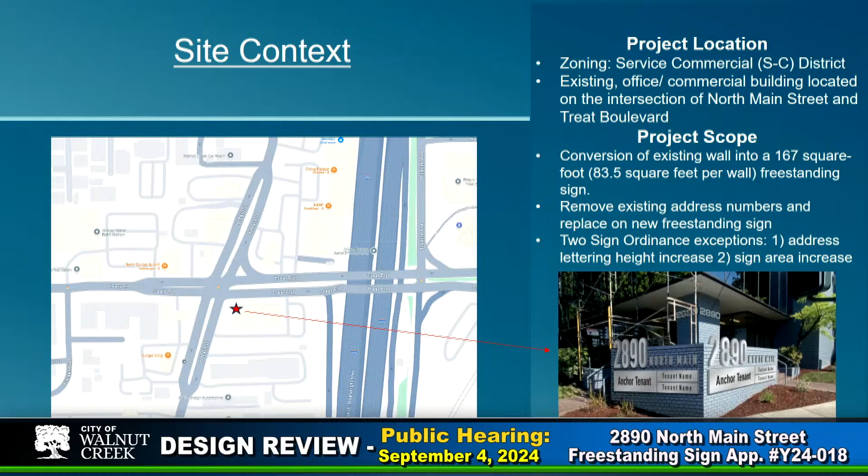The property at 2890 North Main Street is an existing office commercial building located at the intersection of North Main and Treat Boulevard. It is zoned service commercial and is surrounded by various commercial uses to the north, south, and west. Interstate 680 is located directly adjacent to the property to the east.

This project involves converting an existing freestanding structure into a new freestanding sign. The existing structure will not be modified in height, size, or material. Rather, signage will be directly installed onto both perpendicular sides. The requested signage requires two exceptions to the sign ordinance: one to increase the allowable sign area, and another to increase the allowable address lettering height.

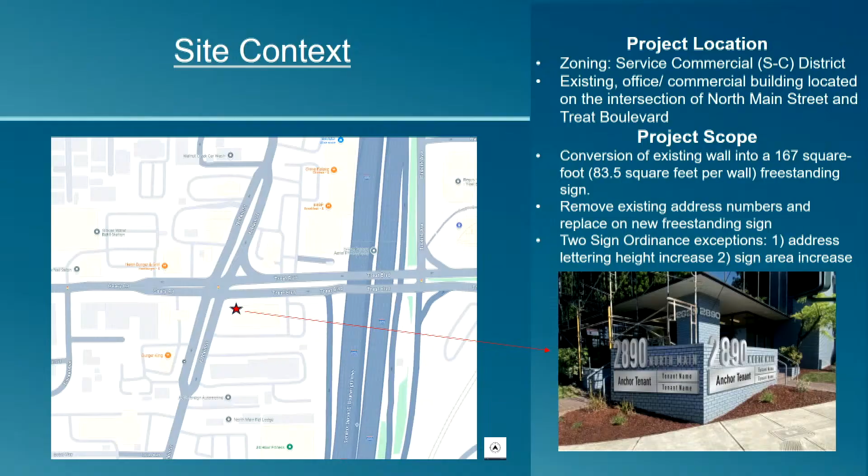The project was reviewed by the Design Review Commission Sign Subcommittee. The Sign Subcommittee supported the proposed design without recommending any modifications. They concluded that the proposed freestanding sign and the two requested sign ordinance exceptions were reasonable, as they would enhance both site and tenant identification.

The sign ordinance requires that new freestanding signs meet the required finding as listed. As previously mentioned, the Sign Subcommittee was ultimately supportive of the freestanding sign and believed that the project satisfied this finding. Given the site's location at a busy intersection, the sign will enhance visibility for both the site and its tenants, and will be clearly visible to motorists on North Main Street and Treat Boulevard. Staff is confident that the Design Review Commission can make the required finding.

Sign ordinance exception number 1 allows the proposed freestanding sign to exceed 25 square feet of total sign area. The proposed sign has a total area of 54.88 square feet, with 27.44 square feet on each side. Typically, for freestanding structures with two parallel faces displaying the same content, only one face is counted in the sign area calculation. However, since the proposed structure has perpendicular faces, each face is treated as a separate sign area. The address '2890 North Main' is not included in the sign area calculation as it is the required address sign. The two faces are necessary for wayfinding purposes that assist motorists navigating through a busy intersection. Staff is supportive of this sign ordinance exception.

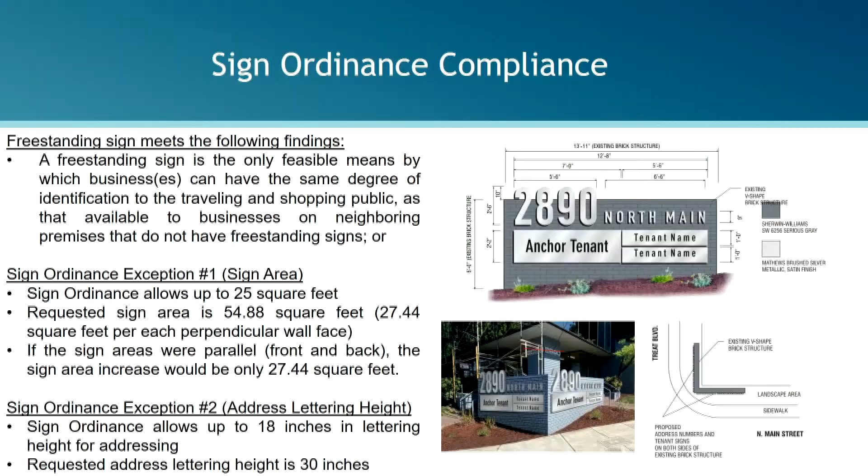Staff recommends this project is exempt from CEQA review under Section 15301 of the CEQA guidelines, Class 1 existing facilities. Staff recommends the Design Review Commission move to adopt the attached draft resolution granting approval of the 2890 North Main Street freestanding sign, application number Y24-018, subject to the conditions contained therein.

That concludes staff's presentation. I'm available for any questions you may have. Additionally, the applicant is present and is also available for any questions you may have. Great, thank you. So before we move to questions, has anyone had any ex parte communication on this project? No. No. Great, does anyone have any questions of staff or the applicant?

Okay, at this point I'll open it up to public comment. Is there anyone in the audience who would like to make a comment on this project? Nobody is coming forward. So with that, any comments from our commission, or does anyone want to make a motion?

I can make a motion to approve this project. I saw it on Sign Subcommittee, and it still looks great. So I would make a motion to approve with the language that was on the previous slide, with the stipulations mentioned in the staff report. Point of clarification, with the conditions in the resolution? Yes, that's what I meant. Thank you. Second.

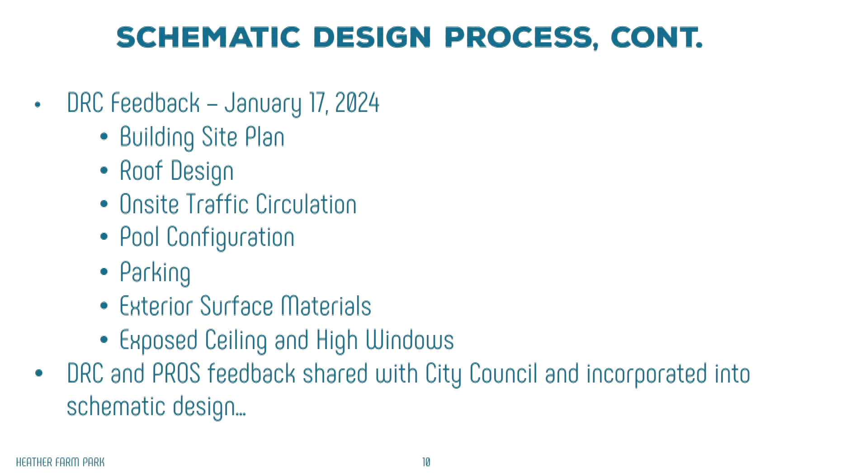So in terms of public meetings, we met with you in January, we met with the PROS Commission in February, and then we had council meetings, 3 of them, in February, March, and April. So what did you tell us back in January? This is in your report. I won't go through all this in detail, but you provided comments and feedback on things such as the site plan, the roof, traffic circulation and flow, parking, the pools, exterior surface materials, and the ceilings and windows. So we took that feedback as we went to the PROS Commission, and then the PROS Commission feedback and your feedback we took to council in March and April.

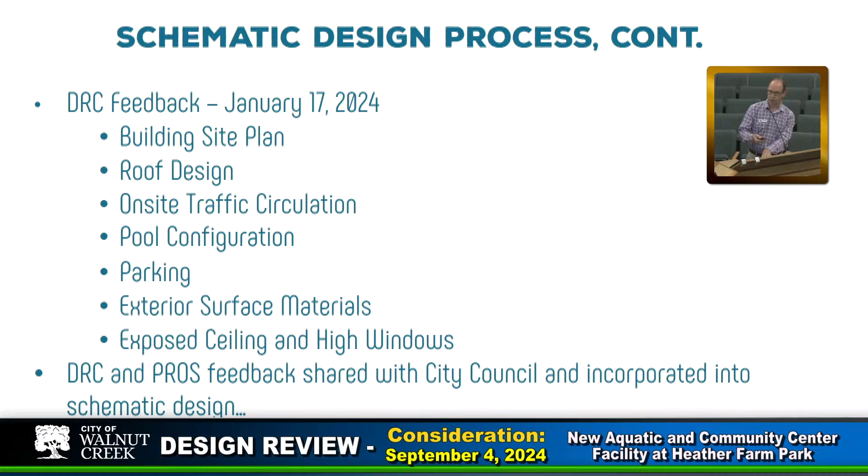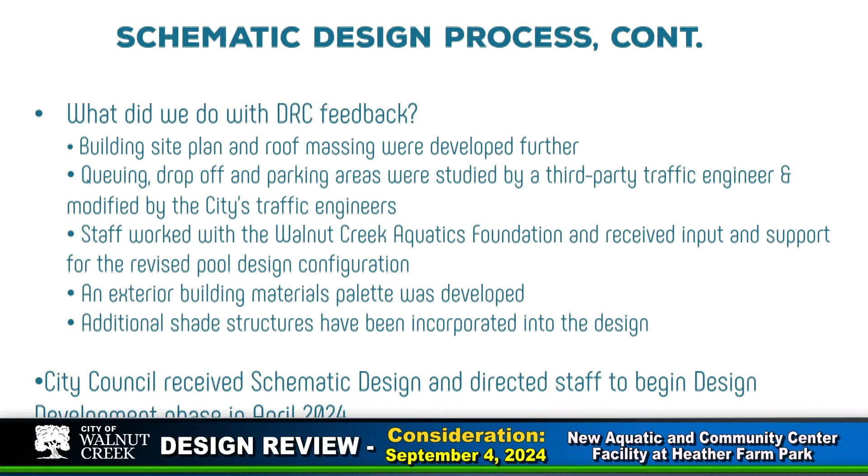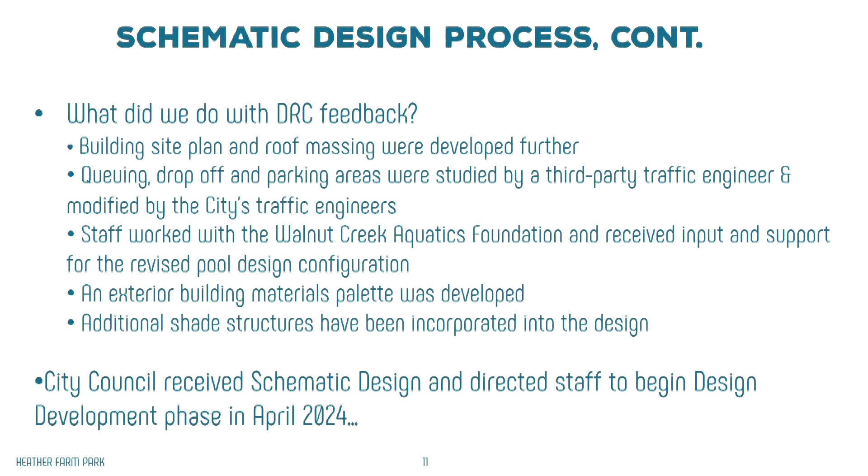So what do we do with that as far as summary goes? We looked at the site plan and the roof massing, the queuing and drop-off. We worked with the Aquatics Foundation, the nonprofit group raising money for the pools, and had an agreement with them on the design. We've looked at the materials palette for the exterior, and we've looked at shade, which is very important to the community, especially in Walnut Creek, especially in the summer, especially outside. Council received that and gave us direction to move forward to design development. That was in April. A lot has happened in the last 6 months or so.

So we had stakeholder meetings, I'll summarize that, and then we have this meeting this evening. We go to PROS on Monday, then we go to council in October. A lot has happened, and a lot will happen in a fairly short amount of time, so that's why your feedback tonight is very important. We had 2 separate stakeholder meetings, one with a group of environmental organizations, and the second with the aquatics groups. The environmental groups were the Gardens at Heather Farm, the Mount Diablo Bird Alliance, the Open Space Foundation, and the Friends of the Creek. The aquatics groups were represented there, which is more of the PROS conversation on Monday.

So what did we hear from those groups? They had suggestions about the planting palette related to trees—you'll hear about that tonight. They had suggestions about bird-safe glass in the facility, and interest in mitigating as much as possible the noise from the pool deck. Teams had interest in power and Wi-Fi on the pool deck. And if you're familiar, there are two, maybe three, very significant events that take place at the pool every year. One is the All-City Swim Meet, which happens in June—1,200 or so swimmers over the weekend. It's a big deal.

So there's interest in supporting that event in the future. And the Walnut Creek Aquanuts has two big events, one that just took place this past weekend, where they're looking to make sure the new facility supports that as well.

So in sum, all the stakeholder groups were satisfied with the design and materials, and ready to move to public meetings, which is what we're doing this evening. I'm going to turn it over to Jocelyn, who'll talk about the design development presentation package for the entire project, then toggle back and forth with Gina, who'll talk about the landscape, and I'll come back later to talk about next steps. I want to stop here for a second to see if there are questions about background or process, how we got to where we are today, and if not, I'll turn it over to Jocelyn.

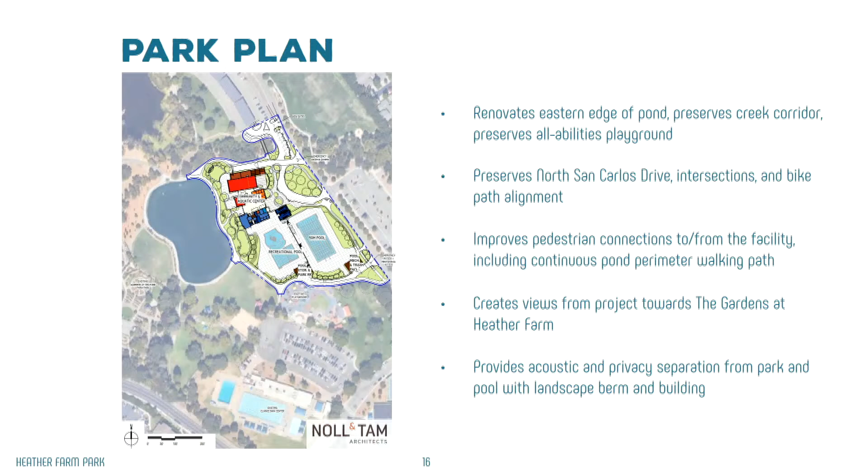Specifically, we're looking to make sure the pond experience is enhanced to some degree by completing the path all the way around the pond, instead of having to jog through the community center to make that circuit. We're trying to make sure the experience of driving through North San Carlos Drive is preserved along with the bike path adjacent to it, that pedestrians still feel welcomed to and through this site, that views of the park are taken advantage of as well as views of the community center, and that as best as possible, the somewhat noisy pool activities are sequestered from other noisy activities in the park, with quieter activities set mostly aside from those.

So within the site itself, hopefully you had a chance to look at all of these amenities. I'm going to gloss over them quickly since which amenities go where isn't exactly the focus of our meeting this evening. But we do have quite a lot of indoor-outdoor connections since we have a lovely climate here and a really beautiful park setting to take advantage of.

And there is a heavily studied drop-off and parking sequence. Everyone would of course prefer tons of parking and drop-off at all entries and exits, but this is a fairly constrained site, so the best has been done with what's available. A lot of folks have studied that, including emergency vehicle access that's had to be thoughtfully integrated with the park experience, since we don't want large typical fire lanes with heavily demarcated red zones laced throughout the park. In addition, we've had to thoughtfully work in maintenance access to the pool decks.

Within the building itself, it's arranged so that the north side has the community center functions, and the south portion has the aquatics functions, shown in red and blue. The large bar to the north contains the newest iteration of the lakeside room, still with a view of the pond and about the same seating capacity, except now there's a partition creating a spillover to a slightly larger ante-room that can make the room bigger in capacity, plus kitchen functions and furniture storage—everything needed for a large rentable conference room, ballroom, or reception space.

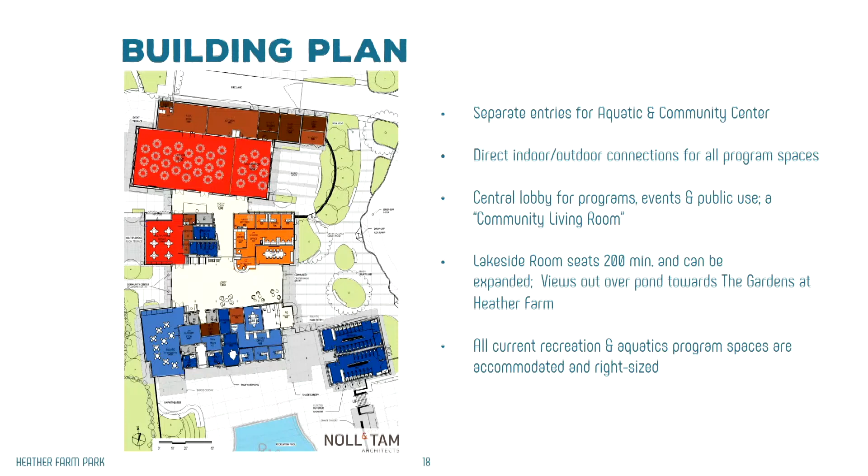There's one additional meeting room for the community center function, and on the aquatics wing to the south there's what's called the aquatics classroom. So truthfully, there are three smaller multi-purpose rooms that can act as programmable classroom space jointly between the aquatics and community center functions. The middle bar contains some back-of-house spaces, a large restroom bar, and the administrative spaces for the community center staff.

Those areas to the south shown in blue have a slightly separate volume off to the right—that's the changing room. It was actually a suggestion from one of the Parks commissioners that we try to make it as close to the entrance as possible. To do that, we had to break it away from the main volume, because the functions on the aquatic center side really want to be on the pool deck—all of them want to be on the pool deck. So it was a little hard.

We had to figure out how to get the most real estate onto the pool deck itself. So you'll see there's a generous entry so that for larger events you can open the gates and many people can come through onto the pool deck at once, but the rest of the time it can be controlled. There are aquatic center administrative and back-of-house spaces, and the classroom I mentioned, which can function either as a space for an arts and rec class or as rentable space for something like a pool party, giving people a separate area for their party that's not on the pool deck.

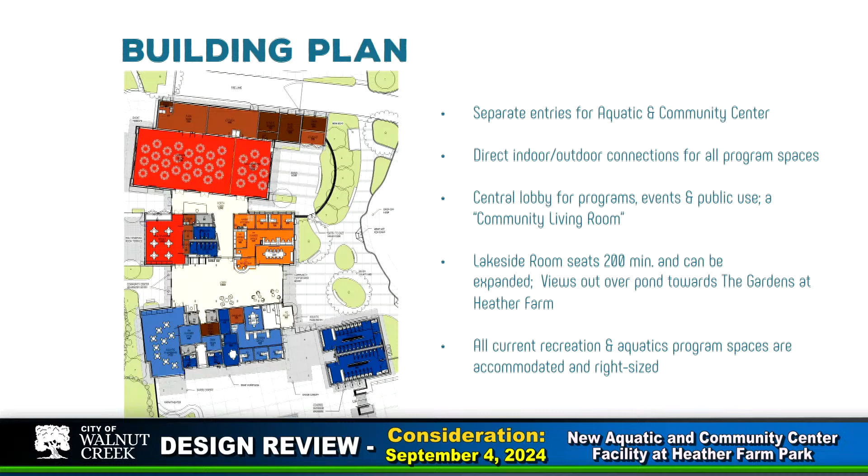And I will now hand this over to Gina, who will talk about the plants that are going to go in here.

Thank you, Jocelyn. Good evening, commissioners. I'm Gina Chavez with RRM Design Group, and we're the landscape architects on the project. We've been working on this project since 2018, when we looked at all the parks and chose this one, so we're very excited about it.

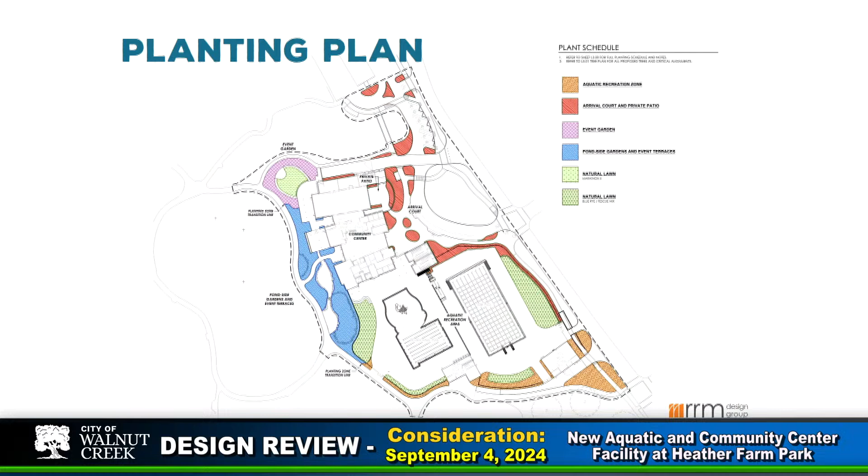I'm going to talk a little about how we came to the planting palettes we have here, and then Jocelyn will walk us through the perspective renderings, which really show that character. When choosing the plant palettes, we were guided by a few principles. One was to reflect the character of Heather Farm Park, which mixes different styles—it has a beautiful picturesque setting with rolling lawn areas and large mature tree canopies, balanced with the more natural vegetation of the reservoir to the north, the riparian corridors around the park, and the borrowed landscape of the surrounding hillsides. We wanted to reflect all of that in our design and make it part of the character of the facilities.

So we divided the plan into different communities based on the use zones, which I'll talk about in a couple more slides. We also worked closely with the public works staff to make sure we were selecting plants maintainable by them—drought tolerant, using native plants as much as possible, and requiring minimal maintenance. One thing we considered was locating plants so they're not growing together, accounting for their mature spread at installation time so we can avoid maintenance issues in the future.

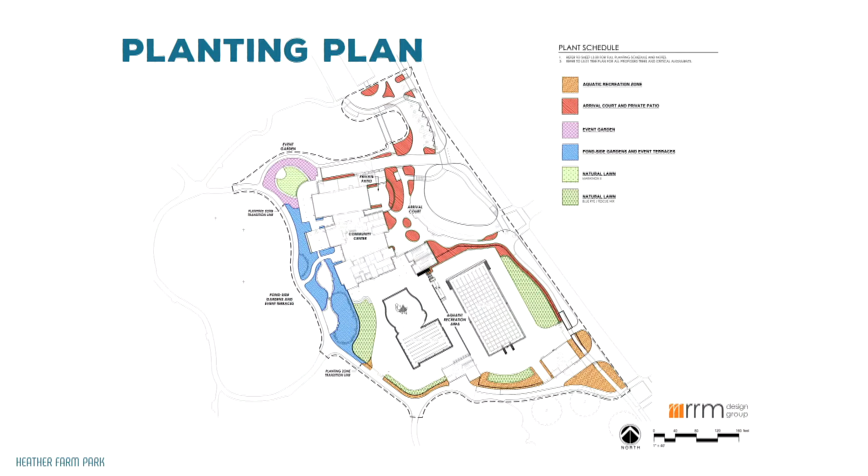As Kevin mentioned, shade is a very important part of this project. We all know how hot it gets out there, especially on that west side where we're going to have some of those event spaces.

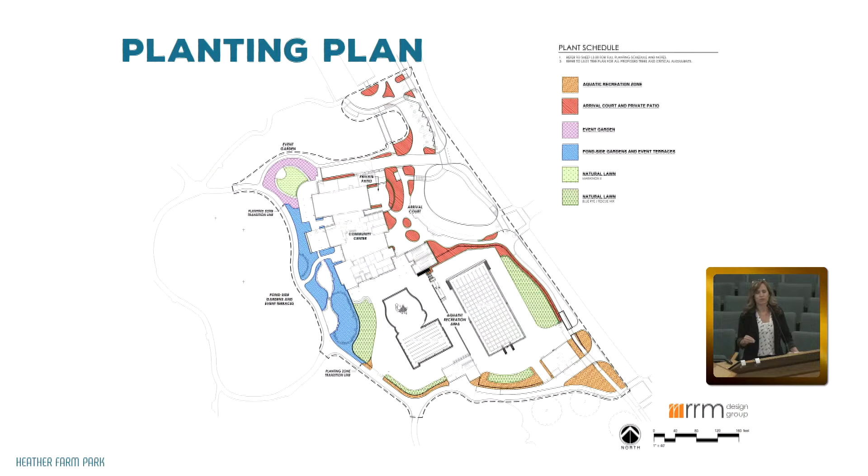So we worked with the public works staff to choose trees based on maximum shade canopy, as well as the maintenance aspect that I just talked about. And then finally, we also selected some accent trees which show that pop of color in the fall and spring. That's what this plan is showing.

Those green trees are the shade canopy trees. The blue trees show some of the shade trees that are a little more functional in the aquatic center. We worked with public works staff to choose a tree with very minimal leaf litter. One complaint we heard was that at Clarke Swim Center, they have a lot of issues with redwood needles getting into the pools and into the system. So we chose a tree called Tristania conferta, for those interested, that has larger leaves and tends to fall less.

And then finally, some of the accent trees we chose were based on flowering color as well as fall color.

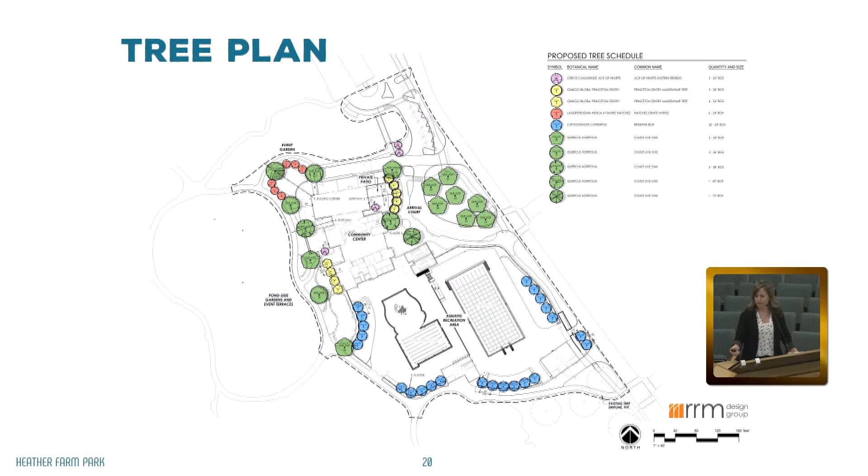So within that mixed upland community, we have three different spaces: the arrival court, the private entry courtyard, and the garden event space in the back. Within these, we're trying to pull out those characteristics of the upland community, which are the large shade canopy trees — we chose the Coast Live Oak, which is also within Heather Farm as well as around the surrounding hillsides. We also chose grasses, boulders, and native ground covers within those spaces.

But in the event garden, we chose a bit of a different palette. We did incorporate some of those elements, but we wanted it to feel more ornamental in the event space. So we chose a darker green palette with some softer gray tones and textures, and white flowering plants so the flower colors don't conflict with any event space colors, for example, for a wedding.

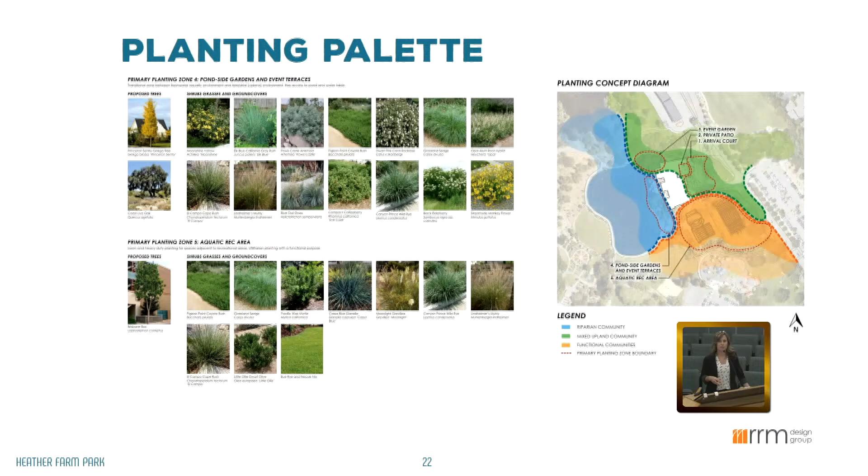The next palette I want to talk about is the riparian corridor palette — that's the blue space again. This one is characterized by grasses and native ground covers, but we also wanted a pop of more of a creek corridor tree color, and that's where we've included the ginkgo. We've heard comments from the native plant community that they'd prefer a native tree, so we're working on that with them. The reason we chose the ginkgo was that it resembles the poplar tree found along creek corridors, but poplar can have very invasive shallow roots, so it's just not practical for an urban setting. So we're still working on that.

And then in the aquatics area, we have those tougher, durable plants like the Tristania conferta, some very durable low shrubs and grasses. We're also selecting a species of turf that really tolerates high activity for those spaces, for people to hang out around the pool area.

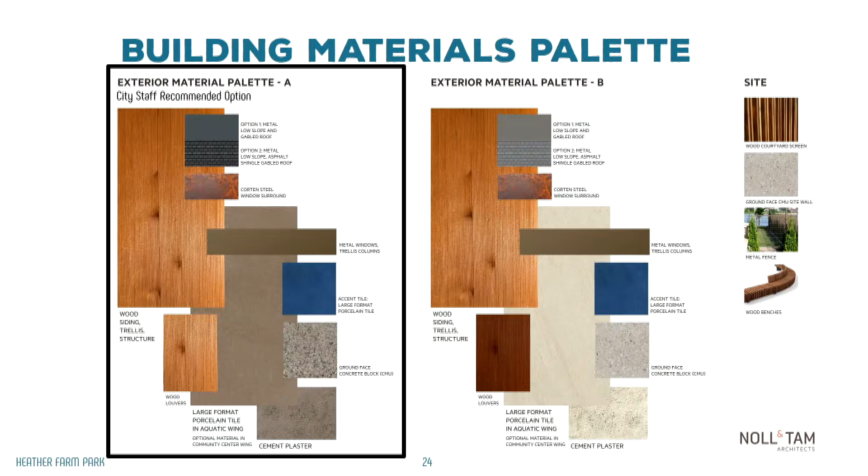The last thing I wanted to say about these palettes before I move on from the slide is that during the community engagement process, we did ask a set of specific questions about the materials that the community wanted to see, and there was an overwhelmingly strong response to have natural materials. Wood and stone and metal were the three strongest responses that we received, and if we could do just those three, we would.

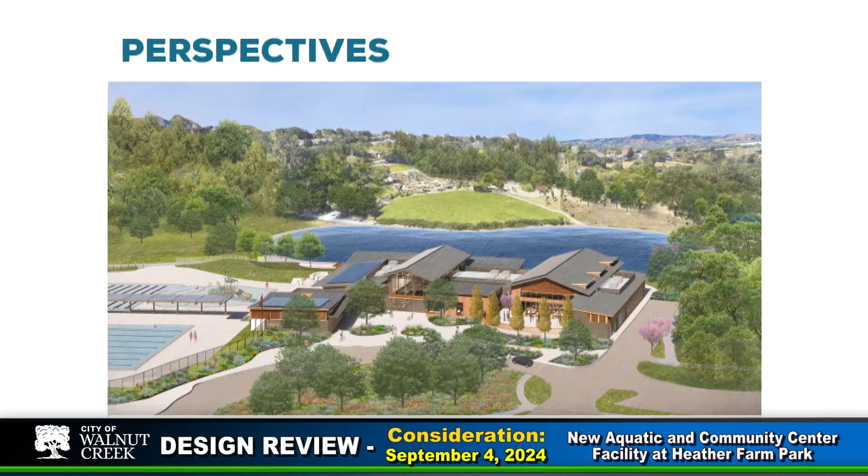All right, so perspectives. I'm gonna start with a couple aerials so that you can see the building massing, although that's not really the focus of what we're talking about, but it'll give you an orientation of what we're looking at when we look at more street level views. So this is a bird's eye view looking towards the east. You can see the Heather Farm Gardens in the back.

So the two gabled volumes are the lakeside conference room I discussed, and then there's also an atrium that hinges between the community center portion to the north and the aquatics portion to the south. The atrium is meant to be like a public living room experience, and it marries the two functions. You see the pools off to the left.

When you have A and B palettes, B looks slightly darker—I keep doing that, it's actually B that is lighter and A that is darker. It's a little bit of a squint to see the difference, especially from this far away, so the palettes are very similar. The main goal is to have this impact of natural stone-like material, wood, and metal accents, and you'd get that either way.

Here we've got the opposite view looking west, you can see Mount Diablo sort of exaggerated in the background so you get the impact of what we're looking at, and you can still see those two gabled volumes. From this side, those multi-purpose rooms look over the pond with all of those exterior event spaces adjacent to the pond itself.

You can see the pools a little more completely and where they sit relative to the existing playground off to the right. Again, squint and you can just miss the difference, but B is lighter and A is darker. It's mainly the tile, echoed by a cement plaster, that changes color—that's the thing you're seeing change the most between the slides.

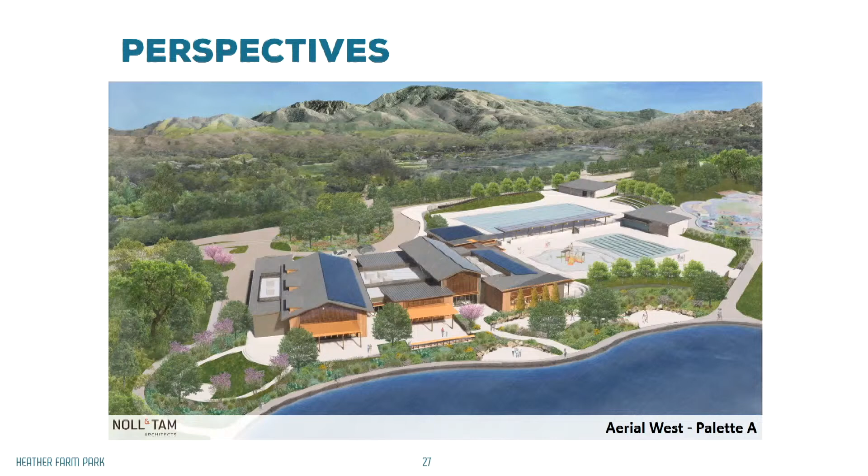Palette A has the slightly darker tile and the more even wood that's all the same color. Switching back and forth, you get a slightly lighter tone and more contrasting wood with palette B—it's a little harder to see on this face, but you'll see it better in views further on.

The interstitial spaces have a secondary wayfinding function. You'd like the secondary spaces to just be quiet as much as you can, but sometimes that's just not how things fall out. So you can see we're making that atrium very welcoming by making it so transparent, but what's closest to your eye when you're walking up to the building is actually the administrative bar. So we're trying to make it beautiful and welcoming, but not saying 'hey, this is a volume you need to walk into.'

So there's sort of three tiers. You've got your most important two bars, demarcated by their height and the shape of their roof — the atrium bar and the lakeside bar. And then there's a secondary set, things that have a large visual impact, like the way the administrative wing is very prominently part of this entry court sequence.

Or if you go to this face of the aquatics wing — we worked a lot with the staff of the aquatics department to talk about that. We've faded them out in this view a little bit, but there's a pretty raucous community pool here, and they're actually trying to go for one of those play structures that's paying homage to the fact we're in natural surroundings with a sort of agrarian past, rather than have it be like Mickey Mouse creatures all day, which many of these structures can look like. This pool deck probably will rarely be this empty.

So there's a little bit of visual quiet that was really asked for and emphasized. But these do have these secondary functions that still need to look and feel beautiful enough that we feel like this is a significant civic building.

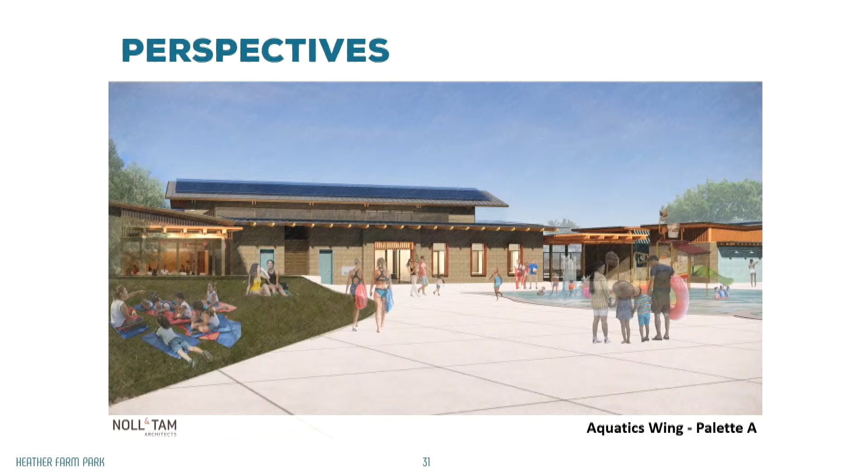And then the truly interstitial spaces are — I think you can see it here best. This north... here's the pointer, is it this guy? There. This north bar has really got all of the truly back-of-house functions. That's where we can have the least amount of emphasis placed, so it's a building in the round almost entirely. That north bar is kind of the only portion that doesn't have a function that has to communicate with the outside, but you will still see that north bar.

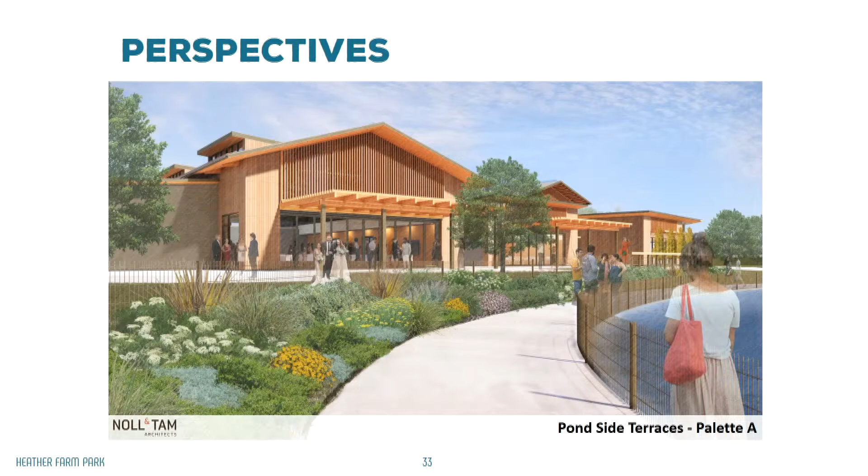I'm going to go back quite a few slides. Oh no, here you can see it quite well. This north fire lane has the pedestrian path that comes across the existing bridge over the creek from the parking lot and then out to the pond. So there's literally no face of this building that is truly unseen by the public.

So it means we've had to say: okay, there's the most glorious, there's the slightly less prominent but still needs to be welcoming, and then yes, it's interstitial, but it's still viewable kinds of spaces. Does that help clarify?

We'll talk later. Okay.

Other questions? I think you mentioned that you're not sure at this point about how much of these finishes you can actually afford. So how are you going to decide? If you have to value engineer—which every project does, since I do public buildings—where do you start?

We have really in-depth spreadsheets that we're working on with our cost estimators, so we're really deep into the weeds on exactly the extents of each material we can afford. What happens if we have a 10-foot datum of tile? What happens if we've got a 4-foot datum instead?

We're looking to have as many alternates as we can stomach. We don't like having bad alternates—the ones that, if picked up, have unintended consequences. We do pretty much all public work, so we understand the public low-bid milieu, meaning you need to have thought of all the ways your alternates can affect your project. So everything that turns easily into an alternate, we do that. But the building materials themselves don't make a great alternate, so that's why it's been left to figuring out the rest of that puzzle first.

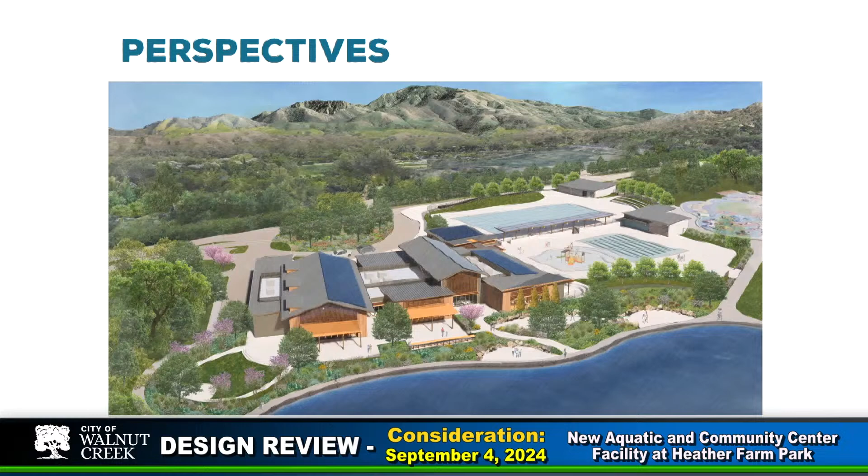In one of the renderings in the background, D2.8 aerial west, there's an amphitheater-looking thing in the background. Is that a little amphitheater area by the pool, or is it flat? That is actually sloped—it has a suggestion of an amphitheater that has been lost to value engineering, and also the staff did not feel it would be heavily utilized.

There's a second amphitheater space here adjacent to the aquatics classroom. That's the one staff felt would be heavily utilized because it's adjacent to that classroom space, so it can act as a spillover. It's also where they'd prefer to gather folks instead of all the way out at the end of the 50-meter pool deck. Cool, okay.

On the site plan, it calls out the shaded picnic area, which I think is cool and great. But there's a gate behind it that looks like it's got a wide pathway leading to it.

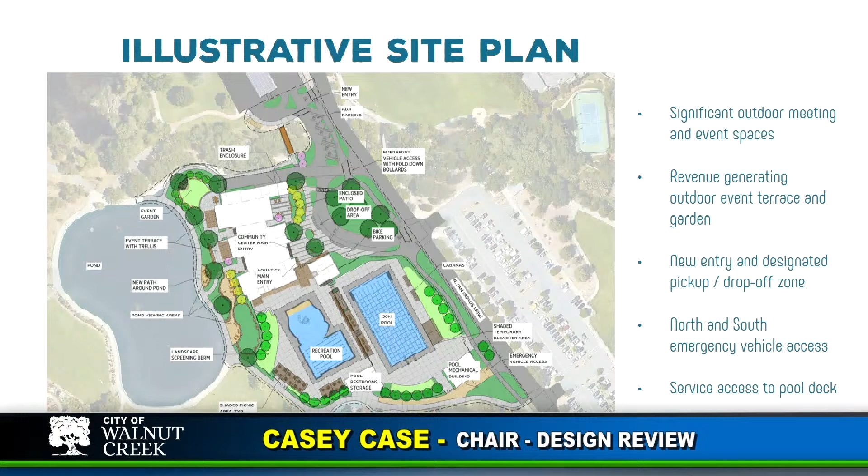I was just trying to understand the shaded picnic area, bottom to the left-ish, and how there's a gate and an opening near that. That is a shaded picnic area for pool users. And the gate behind that is access for what? It has dual purpose - partly for pool maintenance, so they can get vehicles onto the pool deck, but also for when there are large events, there will need to be larger openings for egress and ingress.

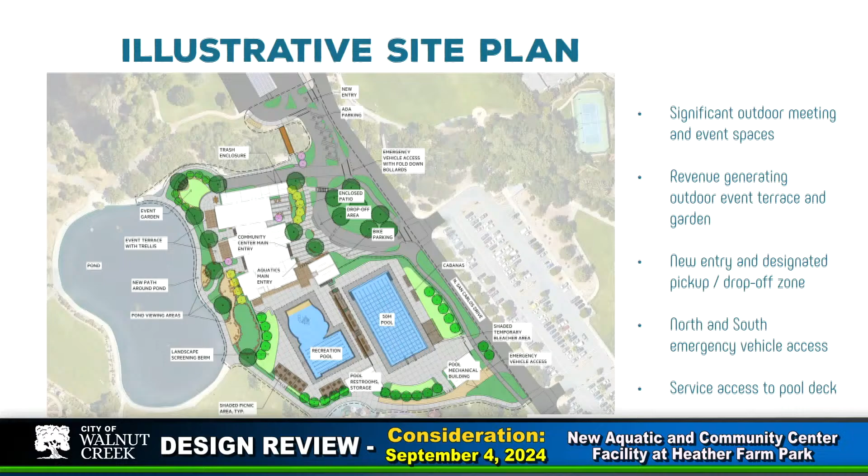Those are my questions, thank you. Is there more to the presentation? That's right, there are actually a few more. There are some interior views. Cool, okay, here we go.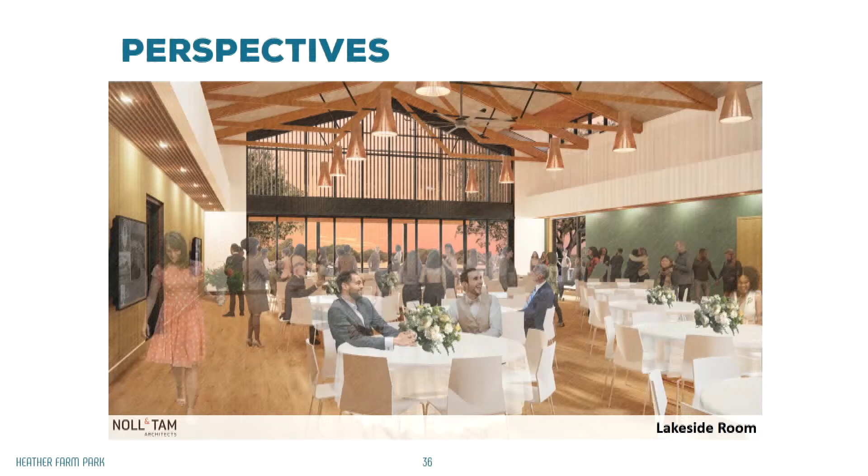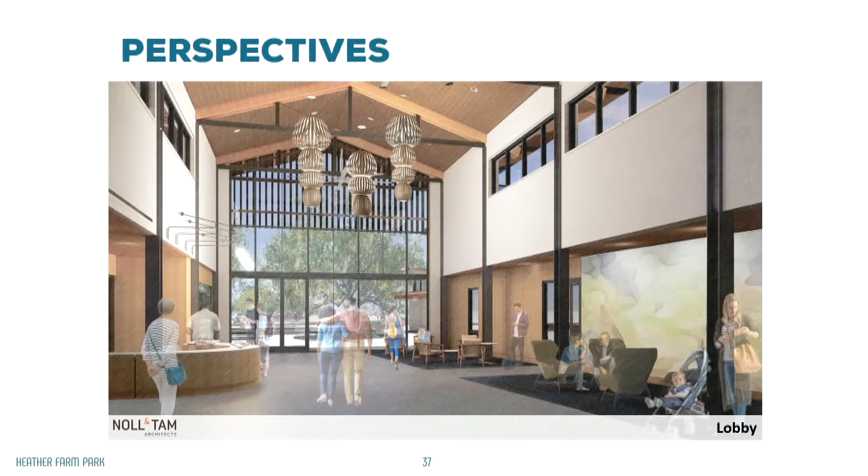And then this would be a view of the atrium. Same thing where we've got exposed metal and wood trusses - we're still walking that line between contemporary and traditional. And this is one of those multipurpose classrooms we talked about. In this case, it's the aquatics classroom that would be looking out towards the pool deck and that amphitheater.

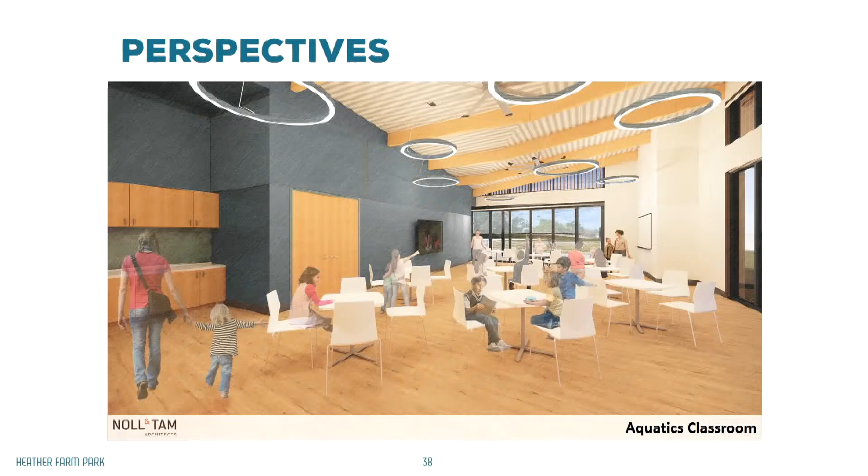Okay, so next steps, and then we'll take more of your questions. We're going to synthesize your feedback, take that to the Pros Commission on Monday, and then we will take consolidated feedback from your body as well as Pros and take that to council on October 15th. Depending on how that goes with council, we may go back again in November. Our intent is to move toward construction drawings, the bid process, and then have a contract awarded by December of next year, so we can start construction, and have a new facility in 2027. Again, your input is critical and important to this process.

Happy to take more questions at this point, and then turn it back over to you for public comments, and then more comments at the end. Great, thank you Chair. Other questions that we want to ask?

I do have one more question, sorry. What's the grade change between the landscaped area and the contained outdoor private event space? Is that up and above, on which side - the non-pond side? That's zero grade change, correct. You can kind of see a bit of it, a tiny bit - it looks like there's a wall. There, you can see it, behind the ginkgos. Oh right, okay, yeah, so that's all level, and we're actually using the grade that's there today. But that wall is to provide a little privacy wall for private events - so maybe you go in there before a wedding, you have some photographing moments or drinks. Okay, so it's all the same level. Yes, that was my question.

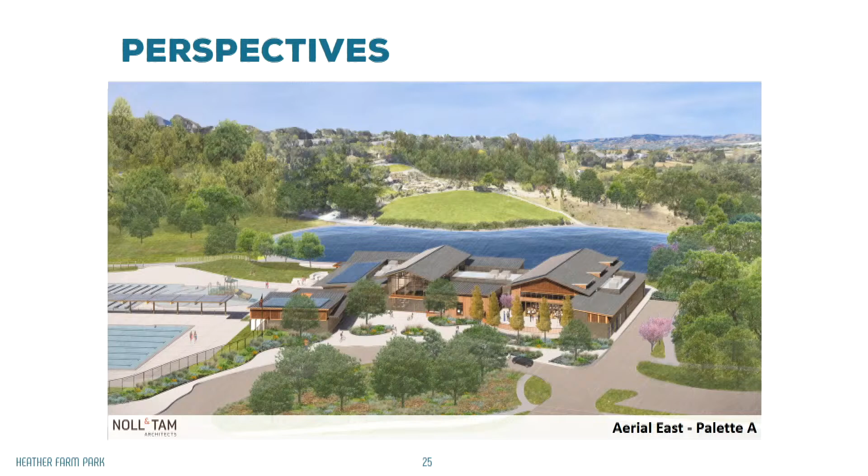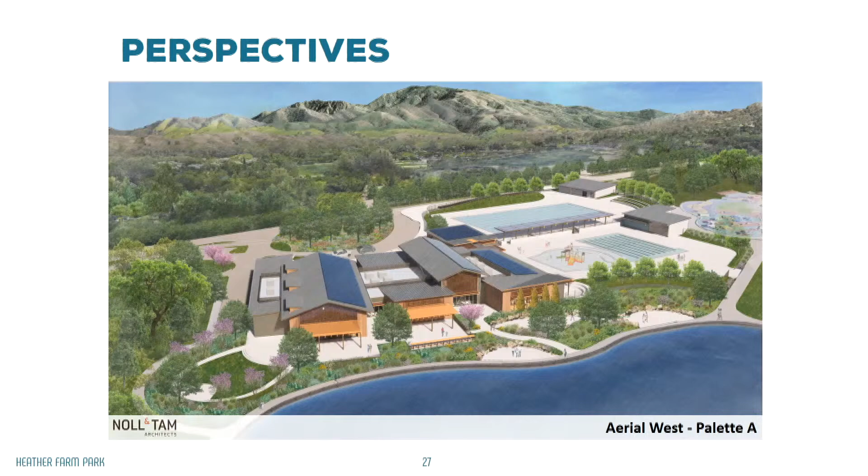So can you go to aerial west palette A? I wanted to compliment whoever thought of the gable plan, because for me, as a native of this area, it's very reminiscent of Mount Diablo, and I love that about it. That was the goal, actually. Good, thank you. So I think that answers some of the goal of the building.

I also just want to say I'm in favor of palette A. The stark contrast between the super light tile sort of ages the building for me, it's too stark. This blends in and meets your requirements, blending in with the landscape and the Walnut Creek identity. Thank you.

Okay, so last but not least, I preferred palette A as well. I'm just strictly basing that on my personal opinion, so take that with a grain of salt. I think it will be interesting to see how that plays into the paving of the exterior spaces, right? Because I responded that it feels a little warmer and like it sinks into the surrounding landscape, so I think that will be a big piece of it.

I don't have any particular objections to the palette, I actually think it's quite extensive, so I appreciated seeing that. I hear the comment for more natives, and there's an opportunity to look at some of the trees, but I also want to make sure there are some hardy, durable plants that can handle this kind of intense use space. I know RRM is fully capable of making sure it's those, but it can be both native and durable. It's important to me that this looks good year round, so it's got to be a mix of things that are visually appealing, durable, and low maintenance, all those magical things that aren't always easy to get in a palette.

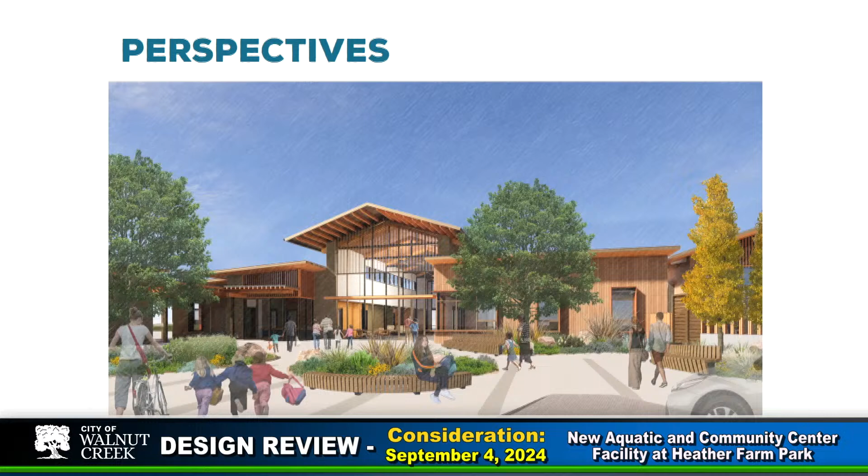I guess I'll just close by saying I'm old school in that I think less is more. So whatever you can do to keep it simple. That's helpful. I think I liked what you said about the high touch spaces, right? So where people can actually see them, use them, great. Around the side, not as important. And I like the idea of articulating the bars differently than what we're calling the atriums.

It's not clear how the materials are applied. Sometimes they use materials to enclose the void spaces instead of letting them be the void spaces between the boxes, and sometimes it's the opposite. That's a good takeaway: go back to your diagram and apply your materials to reinforce the diagram. I understand that instruction.

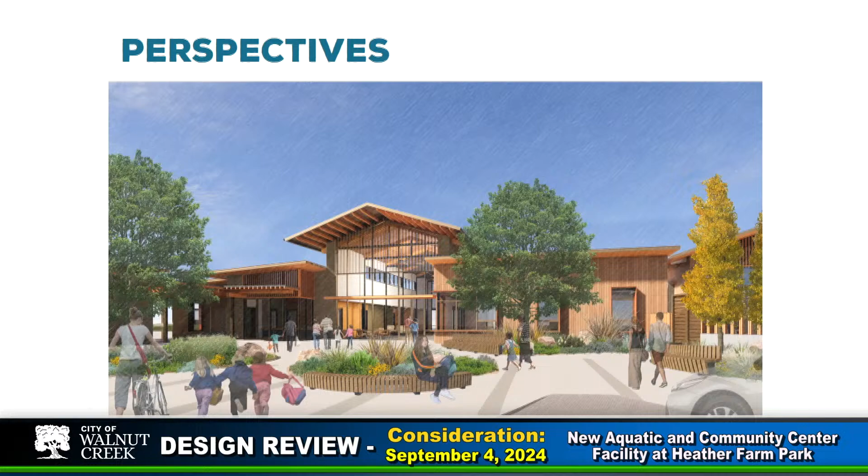Any other comments? We really want to see this get done. I just want to be clear about that. We're working tirelessly to make sure that happens.

I have one minor comment, keeping in mind what you were talking about. This is a 360-degree building with pathways all the way around it, so people will be seeing it. We can't just cheapen up the backside, in my opinion. There's no backside, yeah. 100%. Having clarity of the diagram will help us put in still acceptable materials, in a way that color codes this and reinforces the idea.

I think your comments on void versus volume could actually help with that clarity you're looking for.

The main entrance, the main reception, is a void. But the ballroom, I'm calling it a ballroom, I don't know if it's a volume. That thing is also a void, but it's also a bar. So it's rendered as a void like the other one, but it's a bar. It's not the in-between space between two bars, it's both, so that's why it's confusing. I see that, that's helpful.

I also wanted to bring up native plants again. I really hope the city can commit to a LEED rating, I'll say for the record, because this idea of equivalency is always a slippery slope. I don't know what the budget issues might be, there's probably some hesitation, but it seems like we could do that. I'd love to know that everything in the project, the landscape, native species, water usage, is documented and quantified in a way that provides the most sustainable building.